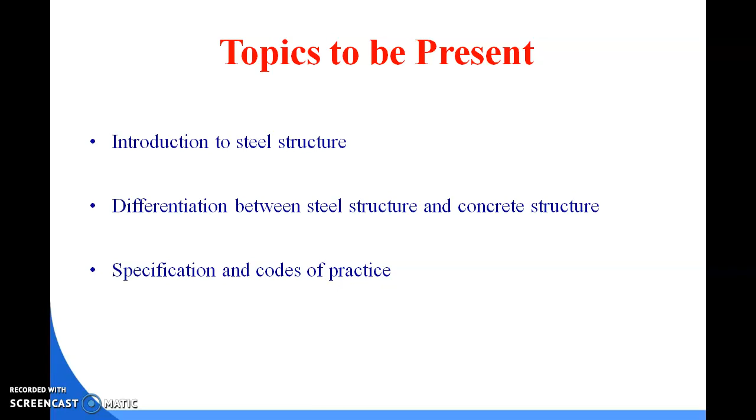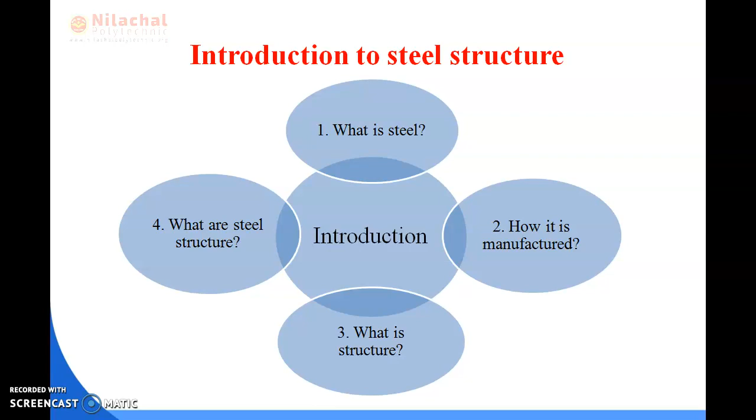So first of all, the topics to be presented. What we will discuss in today's class: first, introduction to steel structure; second, differentiation between steel structure and concrete structure; and then specification and codes of practice. In the introduction to steel structure we need to know four things: what is steel, how it is manufactured, what is a structure, and what are steel structures.

So first of all, steel is nothing but a modified form of iron. When we add 0.02% to 1.7% of carbon and some other materials such as silicon, nickel, manganese, copper, etc. to iron during manufacturing, we get an alloy, which is known as steel. We can use it for any kind of structure, such as a building, tower, bridge, etc. You can see in the figure the types of shapes manufactured in the plant.

You always take these types of sections and connect them by bolted or welded connections to make any kind of infrastructure. The first one here is our H-beam. We will discuss all these shapes later.

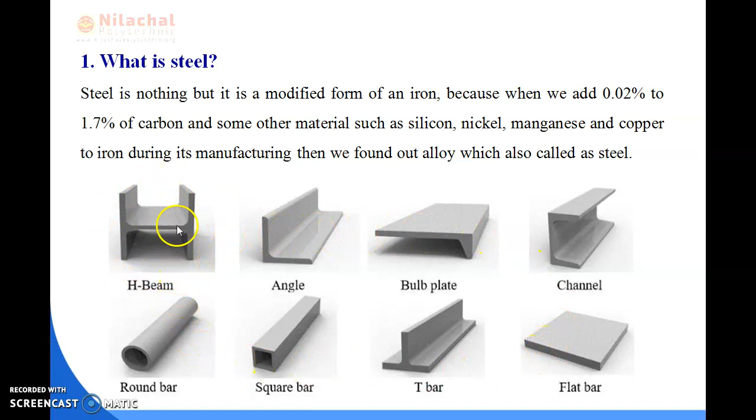Next, what do you mean by design? In civil engineering, designing means finding out the dimensions of a structural member and the amount of other materials used in the structure which will be sufficient to withstand different types of loads and forces applied on that member, while at the same time being economical and providing strength and serviceability.

In steel design, all the calculation is done by the limit state method. Why? Because steel is ductile in nature. There are three kinds of design methods: first, the working stress method, also known as WSM; second, the ultimate stress method; and third, the limit state method. In the limit state method, we analyze the structure in two categories: strength and serviceability, which is beneficial for any kind of design.

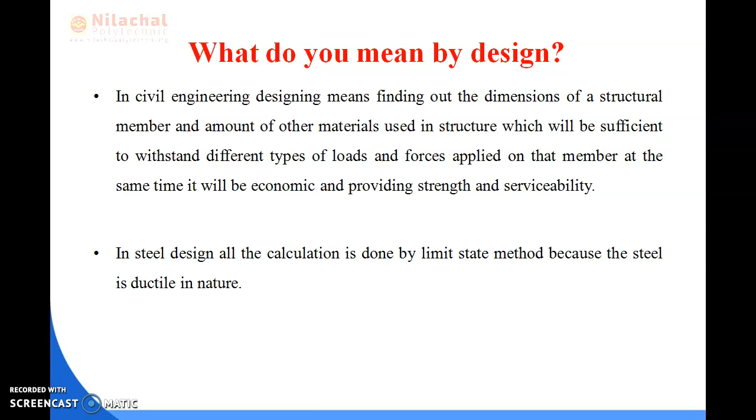The WSM method and the ultimate stress method are outdated today, so we always use the limit state method for design purposes. The second thing is how steel is manufactured. You only need to remember this.

First, iron is extracted from iron ores like hematite and magnetite, with limestone, in a blast furnace. Oxygen is passed through molten iron to remove carbon and impurities to make steel. Then manganese is added to strengthen it. Adding chrome, nickel, phosphorus can impart special properties in steel. Then various steel sections are made, which is most important in this subject; their properties you can find from the steel table, from hot rolled condition like bars, plates, angle sections, etc.

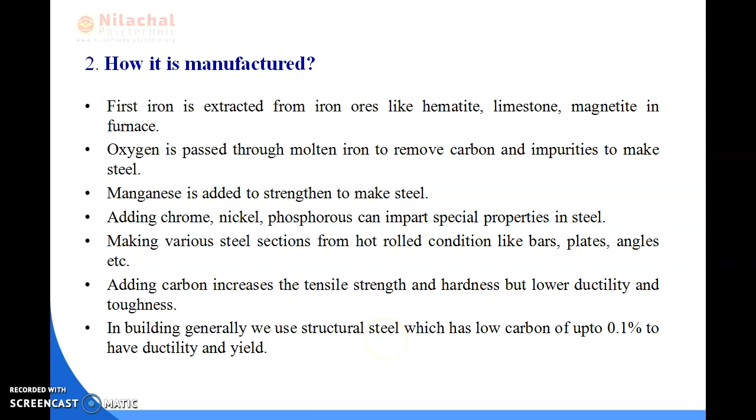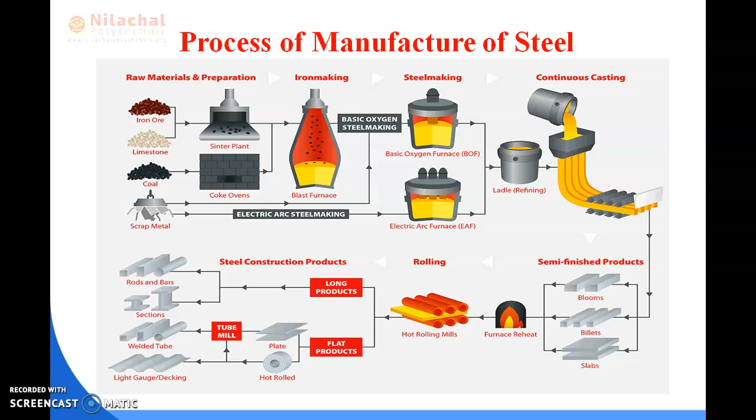Next is what do you mean by structure. A structure is a series of connected elements, meaning structural members, that together form a system. A system means a whole structure that can resist a series of external load effects applied to it, including its own self-weight, and provide adequate rigidity. In civil engineering, a structure is usually made up of beams, columns, slabs, struts, etc.

These are the basics; you already know about these things, so I think you understood very well. Beams are horizontal members, columns are vertical members, and slabs are plate members. So that is all for today.